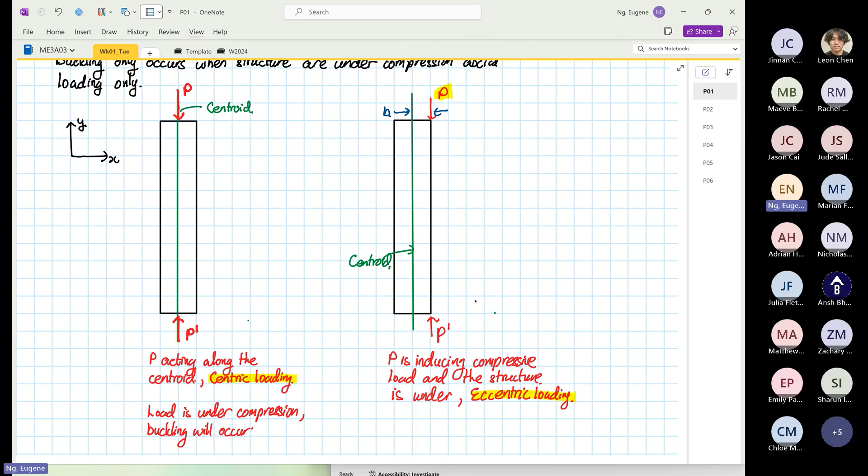Buckling or eccentric loading. Okay. So the thing to take note is these two terms over here. One is called centric loading. It means the load is acting on the centroid, and the other one is eccentric. You can see an offset. The load P has an offset from the centroid. If the condition is right, buckling will also occur. And buckling will never occur if the structure is loaded this way. Okay, if you see any structure loaded this way,

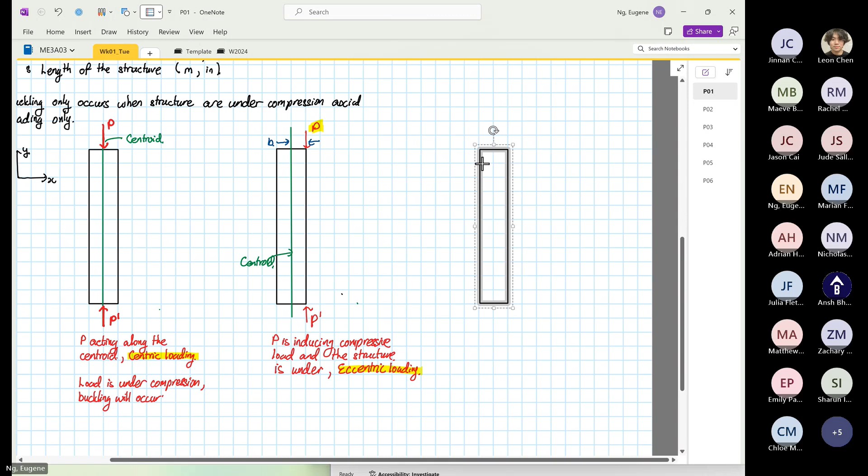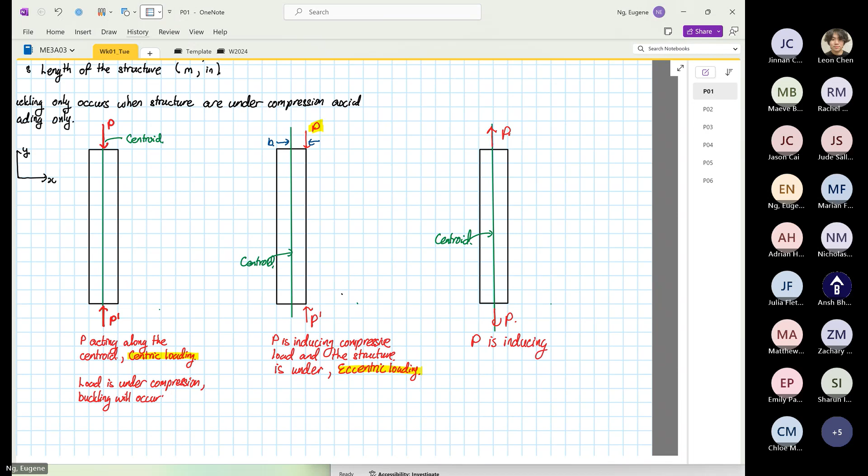If you see a structure, so again, this is our centroid. Now the structure, the load is applied in the opposite direction now. Okay. So when P is acting or is inducing tensile load, failure due to buckling will not occur.

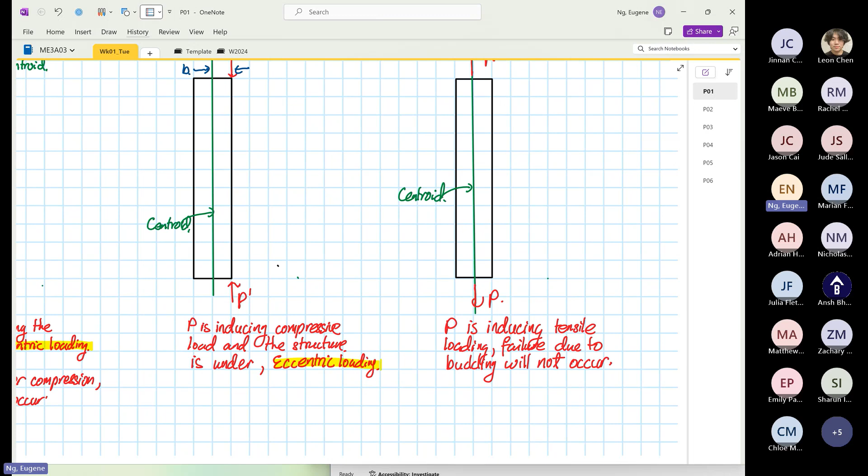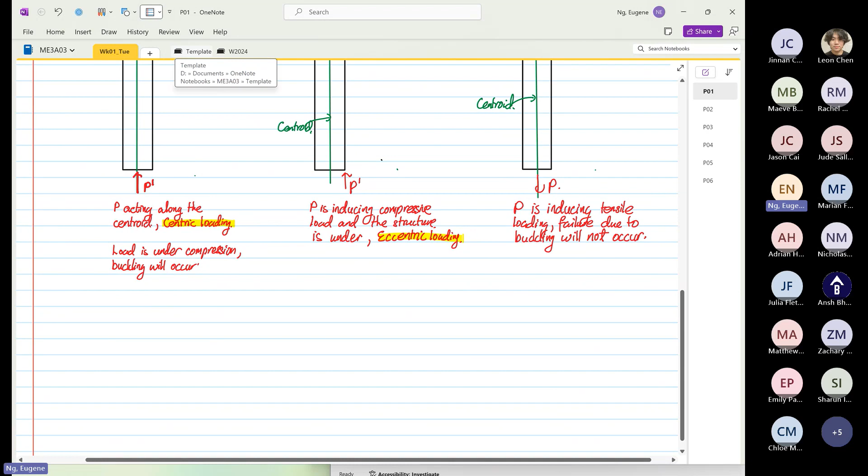So if you see the structure under tensile loading, do not consider buckling at all. The failure mode is no more by buckling. It can fail due to stress equal to force divided by area. Okay, so that's how it's going to fail. Question from anyone regarding this matter? So far, it's very straightforward. Only compressive loading can induce buckling.

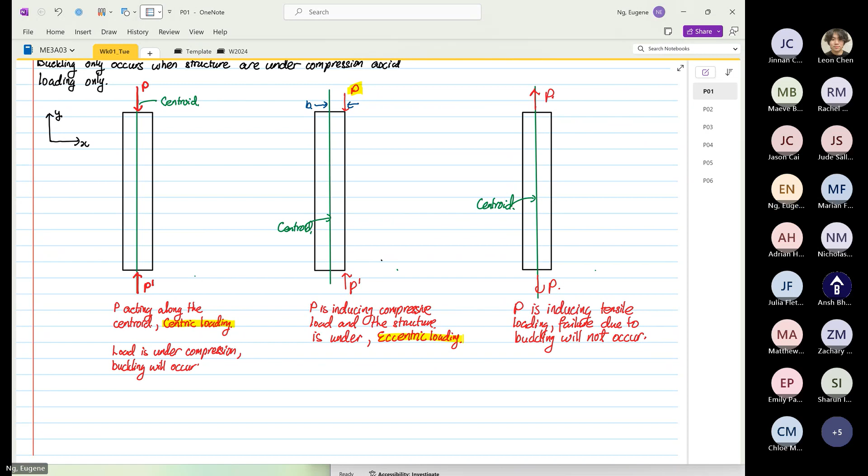Okay. Now the next thing that I want to take note is I want you to recall something that you have learned before under axial loading. So the next thing I'm going to focus on is how mechanical properties relate to the stiffness of a structure. Why I highlight the word stiffness: usually the term used is when the structure is stiff, buckling will not occur. We just use the word stiff, right? So I'm going to explain how the term stiffness relates to buckling or to material deformation under axial loading.

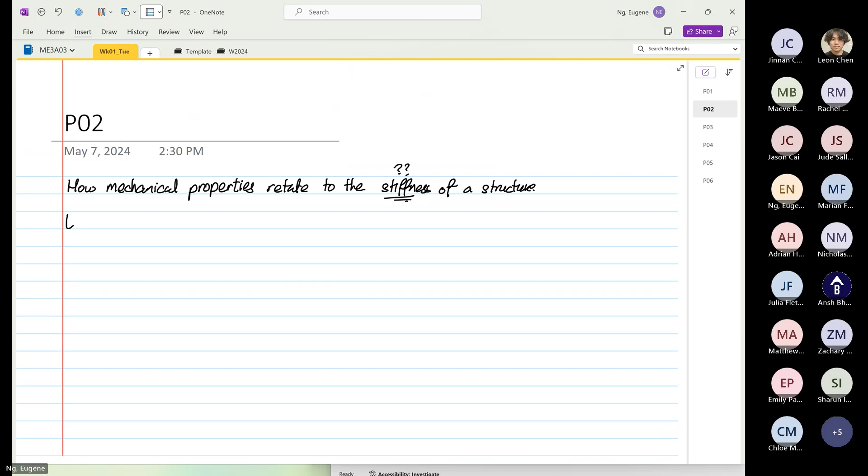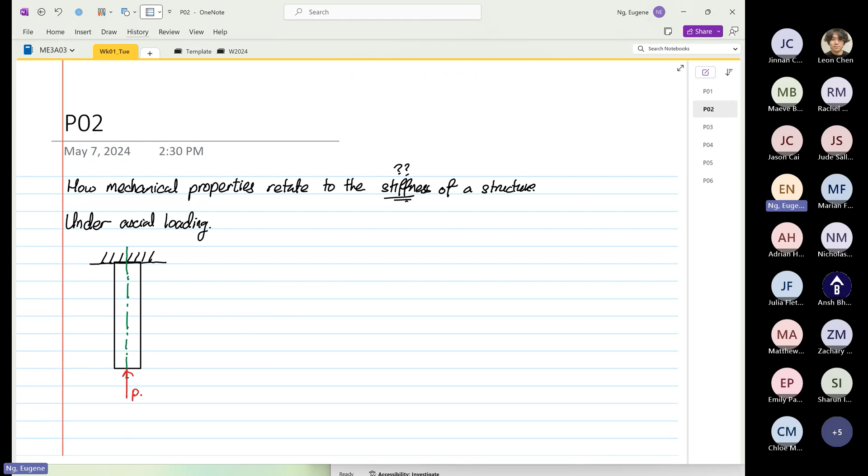So if we have a structure, let's look at a condition under axial loading. Now we have a structure that is built in, and then this is our beam. And again, the beam has a centroid. I'm going to focus on pushing the load in. And then we have this specific dimension. So this is your L0. I do apologize, I should not draw P down here. So we basically have a structure that's no load. And over here, this is your A0. A0 is the cross-sectional area.

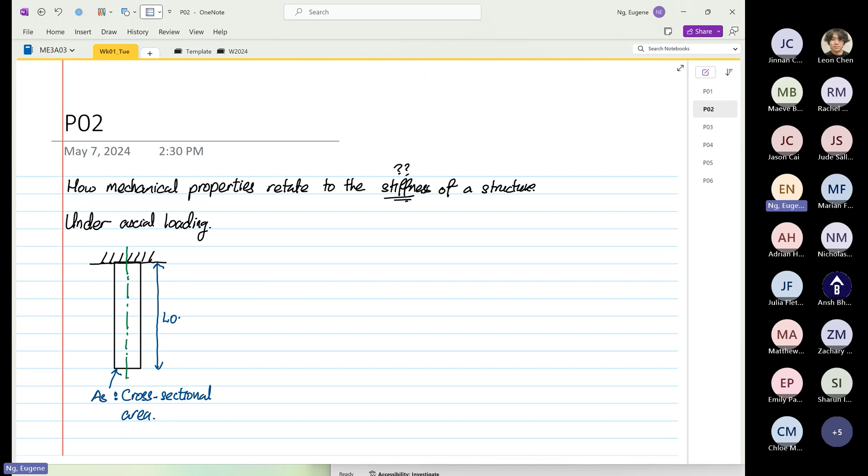And the next one, what we're going to do is put a load. Before I put any loads, I'm going to draw our coordinate system. So this is X and this is Y. And now the same structure again. We're going to put a load, and when we put a load, there will be a change in length. This is exaggerated. By right, it's not so much, but I want you to visualize it. Again, this is our centroid. And now we have a load pushing in. And you realize that the length is shorter and this is our Py. So now the length becomes smaller. So this is our L1. And if I were to extend the line, the original length, over here is what we have as our delta L.

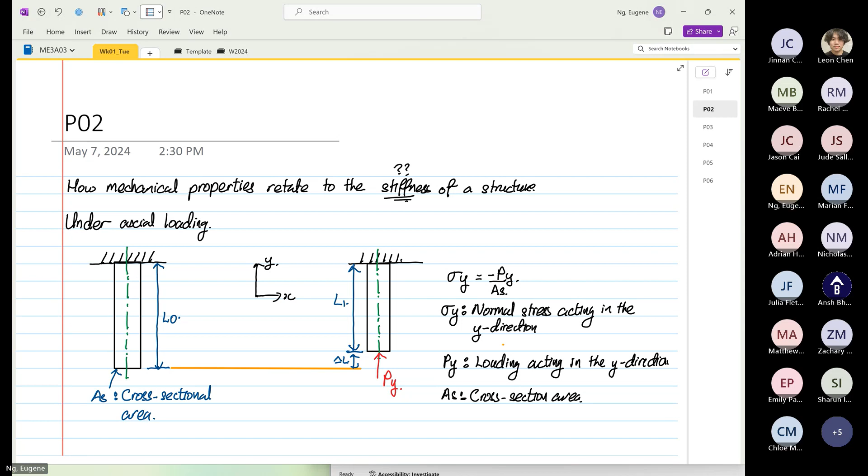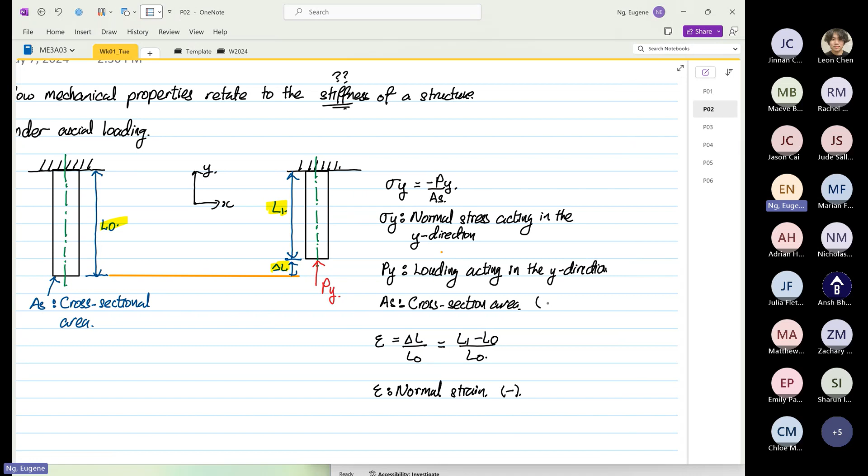So now looking at the formulation, we know that the normal stress in the y direction is equal to minus P over AS. Let me define stress Y as the normal stress acting in the Y direction. Then we have Py, which is the load acting in the Y direction. And we have AS, which we know is the cross-sectional area. Because the load is under compression, we have a minus sign. And then the next thing that I'd like to highlight is epsilon is equal to delta L over L naught. And this will be equal to L1 minus L naught over L naught, where epsilon is the normal strain. We know delta L, L naught, and L1 are all shown down here. I'm going to put units into all this. Strain has no units. Cross-sectional area is in meters squared or inches squared. Py is in Newton or can be pound force. And the stress is in Pascal, or over here, it can be pounds per square inch, PSI.

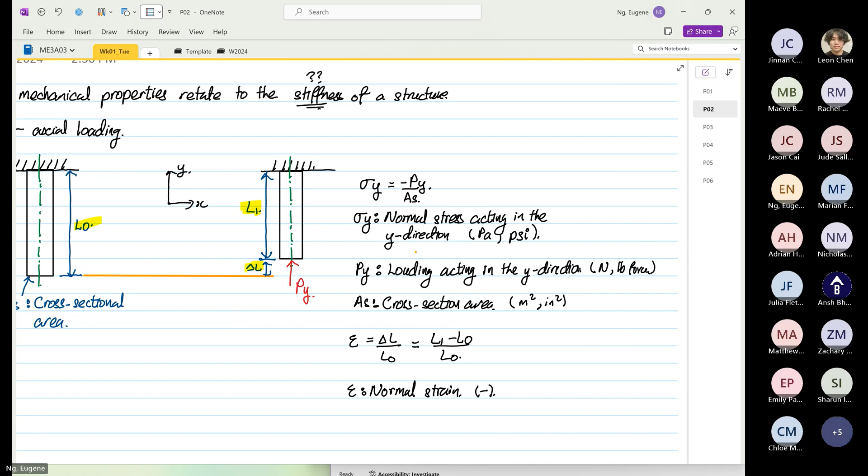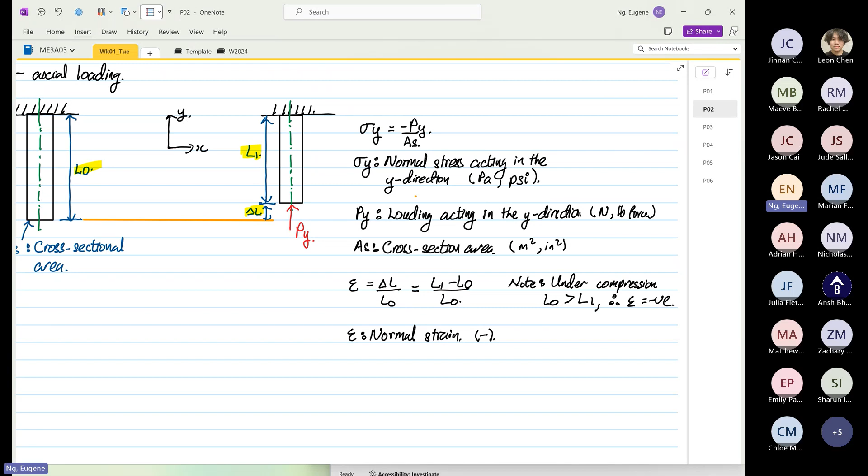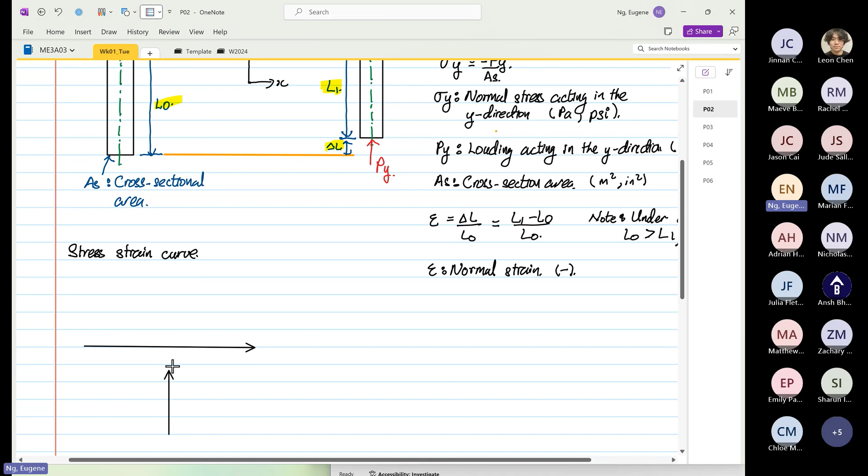So what we realize over here is that under compression, L naught is greater than L1. Therefore, epsilon is equal to what? Negative. Your epsilon has to be negative because L naught is greater than L1. So why am I emphasizing this? Now if we were to construct a stress strain curve, one of the axes is for strain, epsilon, and the other one is for normal stress, sigma. Because our strain is negative, and our stress is also negative, the stress strain curve we will get in the elastic region will look like this.

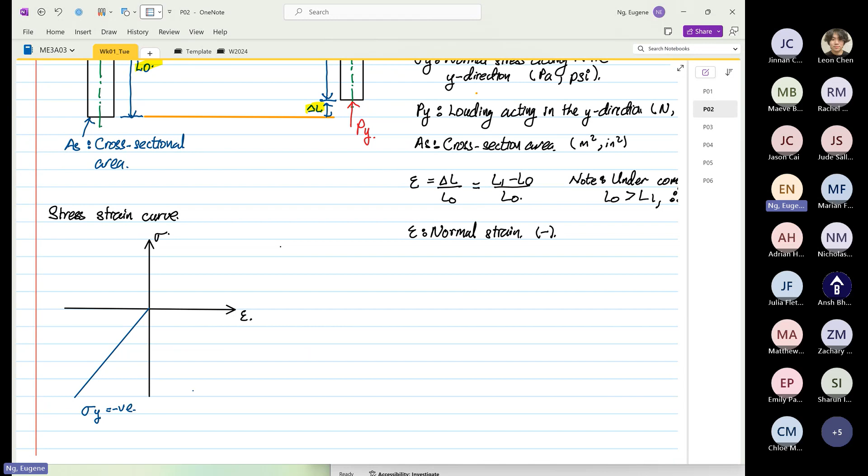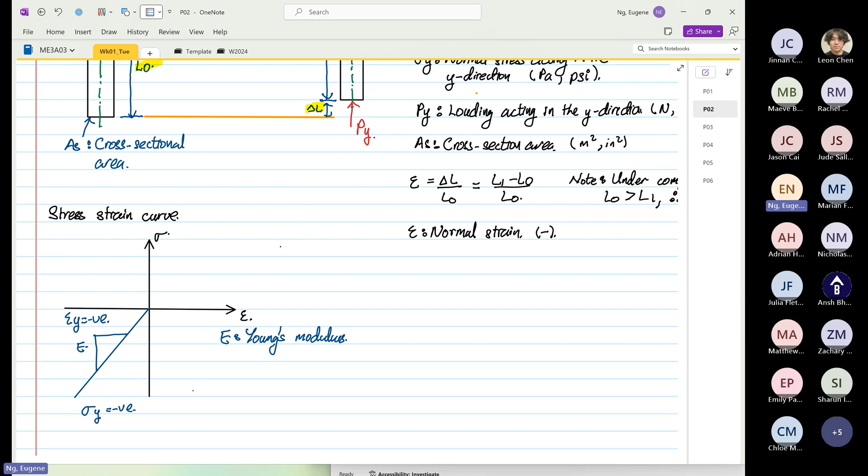Why is that? Because over here is where stress y is negative, and over this side is where strain in the y direction is also negative. So this gradient over here is equal to our E, and E corresponds to our Young's modulus. So we already formed two equations. We know that this is our equation number one. Hold on, someone has typed something in the chat, and I want to see what it is. Oh, okay, nothing. So I'm going to call this equation number one. Over here, we are going to call this equation number two.

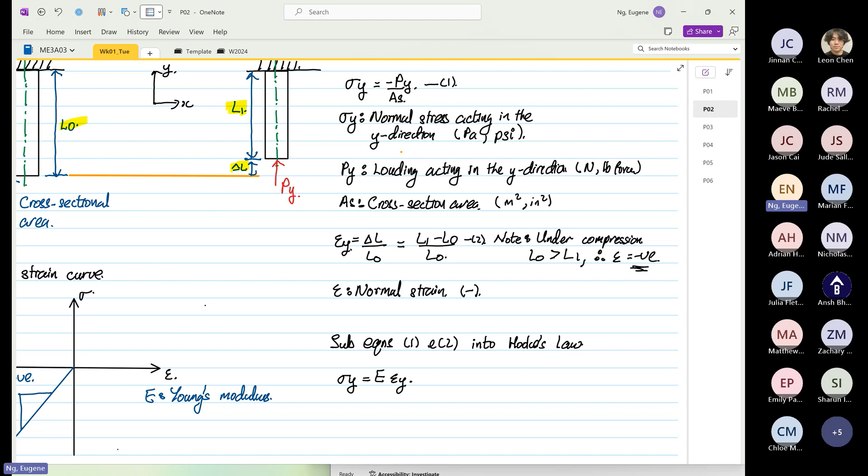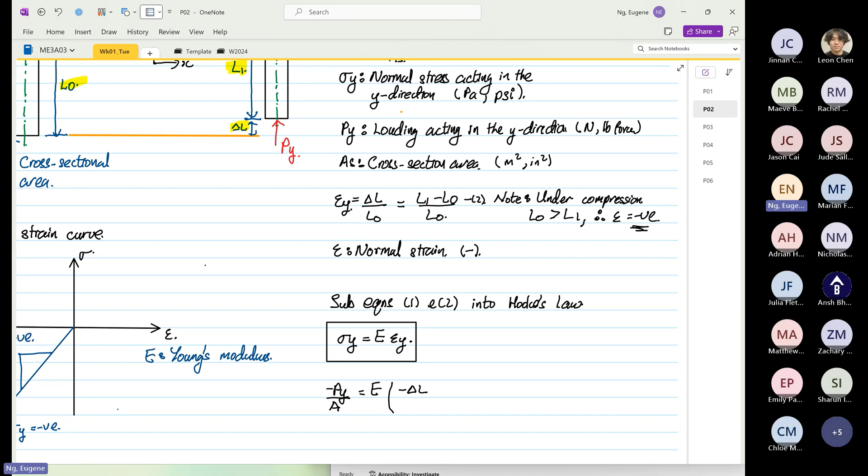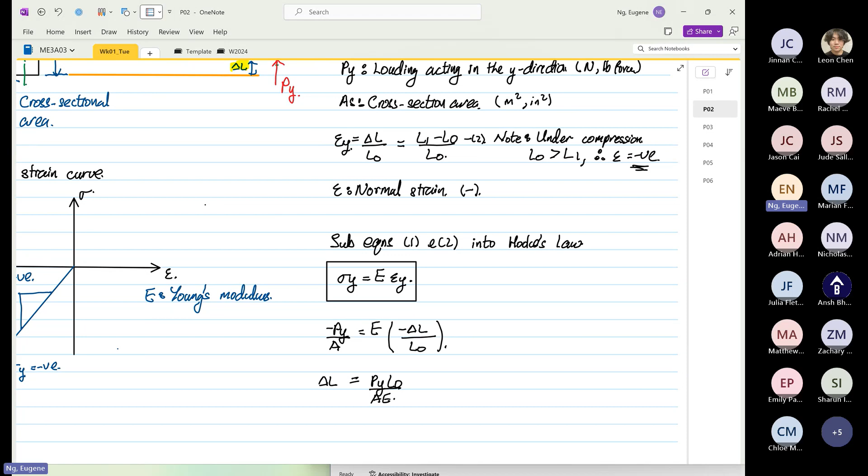So we are going to substitute equations 1 and 2 into Hooke's law, where Hooke's law specifies that stress y is equal to Young's modulus multiplied by epsilon y. So can you put a y on equation 2 down here, please. So we're going to substitute equations 1 and 2 into Hooke's law, and Hooke's law is this law over here. So we know that stress y is equal to minus Py over A, or force in the y direction divided by A. And this will be equal to Young's modulus, and epsilon y will be equal to minus delta L over L naught. So the change in length, delta y or delta L, is equal to Py L naught over AE. So this is our equation 4. And for this case, delta L